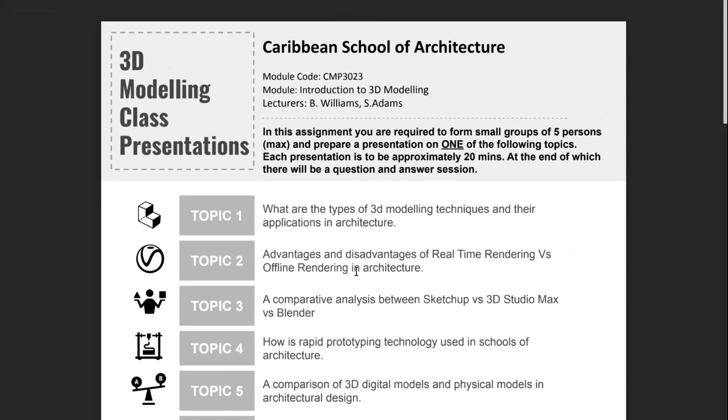Okay good. Now what we're going to do is we want to touch 2 topics today, and then in 2 weeks' time that would be the topic that presents. That's how we want to do it, so I don't throw you in the deep end. So I was hoping that persons from topic 1 and 2 would be here to benefit from the topic 1 and 2 discussion.

I'm looking back at my class list to see. No, I don't see anybody from... Oh, Janelle, you're from topic 1. Hi sir. All right, so you have 1 representative from topic 1. What about topic 2?

Let's take a quick look at that Miro board. Right, so topic 2 - Tara and Maken, not here as yet. Okay, so do we have the class rep in the class? Do we? Hi sir, I am a class rep.

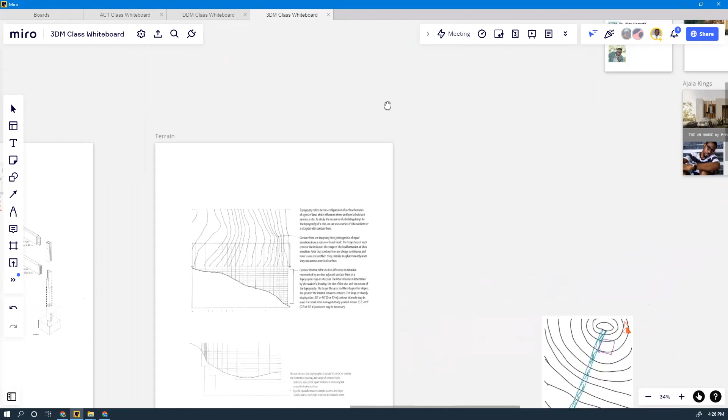Before I go into our discussion, we are currently also working on our major project. So persons should be submitting their terrain along with their CAD drawing, their design sketch, and their drawings. So the terrain was a part of last week's class activity.

So if I scroll to the class website, there we go. For those of you who submitted, you can check your grades. Is this linked up? Yes it is linked up. So this is where you can go to check your grades. There's a check grades button right here on the class website. When you go there, you can let me know if you don't see your percentage there for participating.

But remember how class participation works, we talked about this at the beginning of the class. We're going to have some activities that are randomly distributed throughout the course. You take part in these activities, it counts towards your participation grade. Participation is not just being present in Zoom - it's about proving that you had participated in particular activities throughout the module.

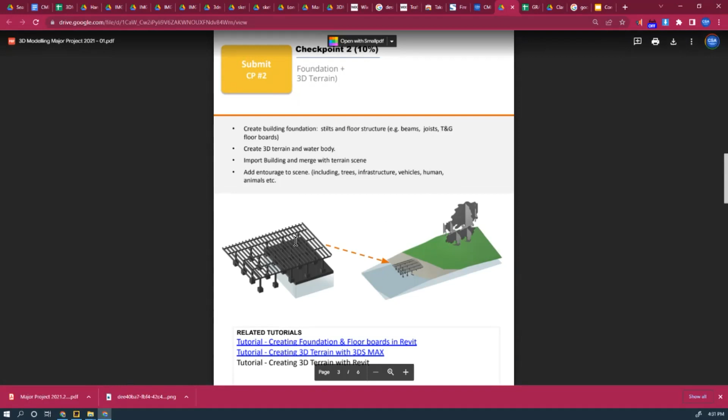Now the great thing about this is that on the handout—let's head back to the website here—if we look on the handout, there are some tutorials available. Now that we're moving into checkpoint 2, we want to have a quick discussion on the foundations. Checkpoint 2 requires that we do a foundation and a terrain drawing.

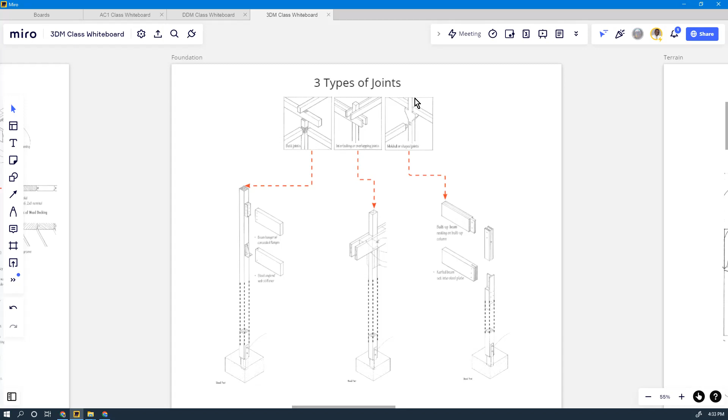Now if you look on the Miro board, there we go, you will see that I placed some nice reference material. Most of these are screen captures from Construction Illustrated, which most of you should know about. It's on the book list for recommended reading, and it's perhaps a book you've used during Design Studio, to remind you how different joints work, foundations, what certain details look like. Everybody familiar with this book, right? Yes, sir.

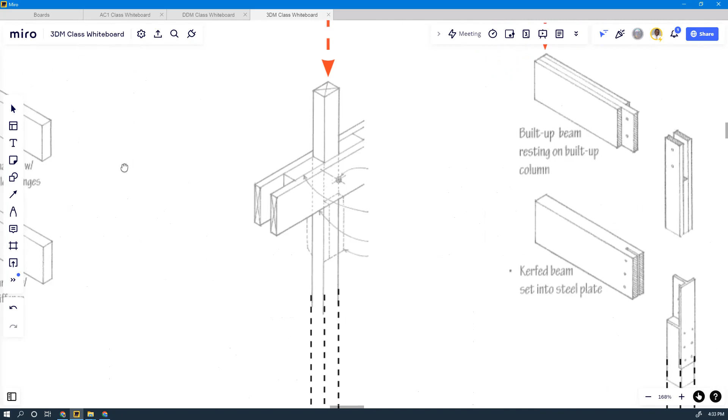I figure that yes is for everybody. So when you're putting the foundation together, I expect you to keep these approaches in mind. It is not necessary for you to draw or model nuts, bolts, and screws. But things like representing how they work—for example, in this case, we would perhaps need to model a section like this, and then another section that looks like this. We don't need to model the holes represented here, nor the angle plates. Those are not necessary to create. However, the model that is created must represent the logical way how these elements work.

Now what we're going to do is tackle this in Monday's class. So I'll do your practical class on Monday, and then we'll come again for another in-class activity. I want you guys to come with your Revit ready. We will also try to squeeze in some modeling in 3ds Max, but I figure most persons will be modeling in Revit. Every year there are persons who ask about terrain and organic objects, for a program that gives more freedom and flexibility.

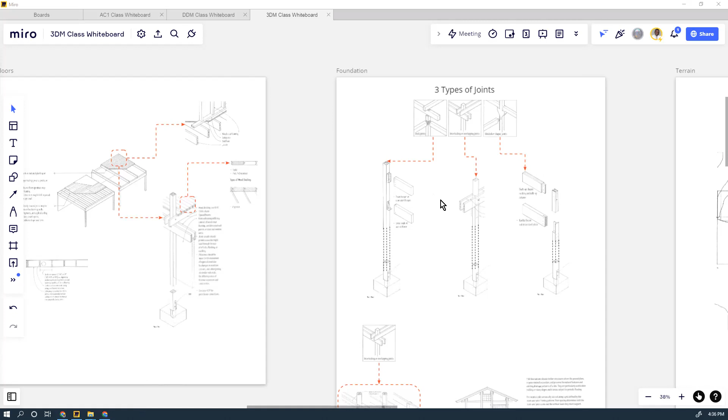I can't wait until which topic was it again? I believe it was topic 3. Topic 3 should educate us about the differences between some of these software. So I'm looking forward to it. Joel and Theodore, are you guys here? No, not yet. Okay, well anyway. Oh, it's because—okay, sorry, right. So I'm looking forward to your topic, for you to educate the class about some of this software.

So I'm giving you guys a heads up for that modeling session we'll do on Monday. Now you don't have to wait—the clock technically starts ticking from today in terms of checkpoint 2. Some of us already know how to use Revit and stuff like that. However, we will do an in-class activity to get everybody going. And if I look on the calendar here, we can see that one is due on the 24th.

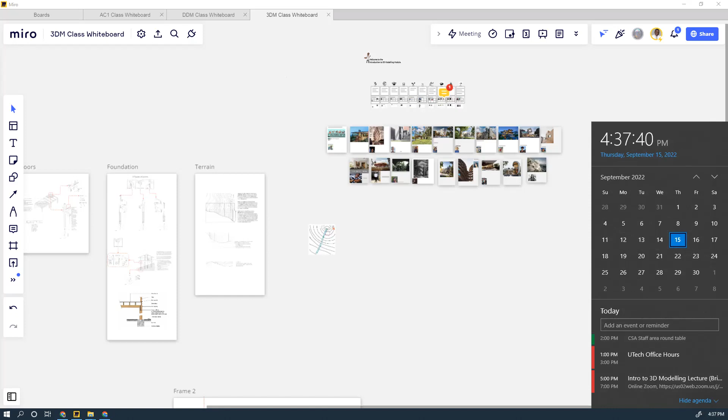Let's take a look here—on the 25th, right, which is the Sunday. Good, so for those of you who want to get a head start, that's fine. We'll do a little in-class activity on Monday. Now the good news is that the handout does have some tutorials, particularly this one about creating the foundation and floorboards. Oops, yes, those are ads.

These are tutorials that were created specifically for this module. I did create these tutorials as well, and I actually did it using the actual project. So this project was actually my project, which mimics the same project that you are doing here. It goes through how to create those floorboards. All right.

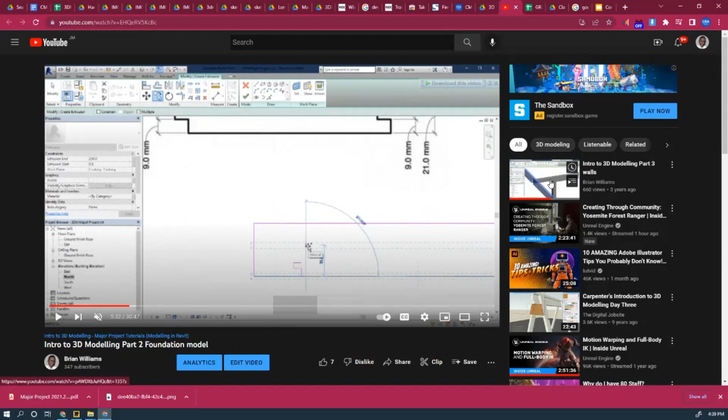All right, so what we're going to do on Monday in class is the terrain. There isn't a 3D creating tutorial made yet, so this will be our next in-class activity. Some of you who want to use 3ds Max to do your terrain can, because there are advantages. Some persons create their terrain in Revit and then take it into 3ds Max to make it nicer, so we'll look at how we can do that as well.

All right. Okay, let's open up.

Now, for those of you who want to get going on your model, you need to have your schematic drawings already completed, because it will help answer some of the questions you need to know to create your foundation. Remember, checkpoint 2 requires only the building foundation and floor structure, meaning the beams, the joists, and the tongue and groove floorboards. You don't need to start creating the walls yet. Here's a quick example of what it should look like. That's straightforward, so these are the two things required.

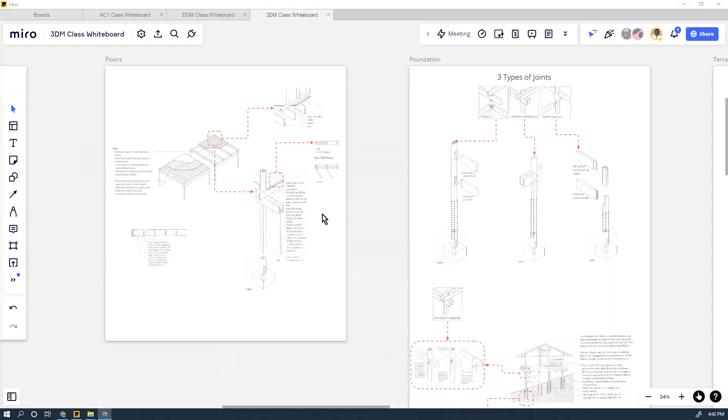It's only fair because the persons who did select groups did not know what the topics were. All they got was a little hint at the top, and they had to choose the topic. So technically they didn't know either, but some people kind of figured it out. I think it was Tara or Janelle that figured out that this is a V-Ray icon, so it had something to do with rendering, and then the topic was revealed. That's the kind of activity we did.

All right, so give me the names of the persons who are not in groups. Anybody here who is not in a group? Can you raise your hands? Oh, nobody? Oh, one person? Okay, cool, just one person? Or Kiana?

There are 3 persons in the chat. Oh okay, yes, let's put it in the chat. That makes it easy. All right, come on.

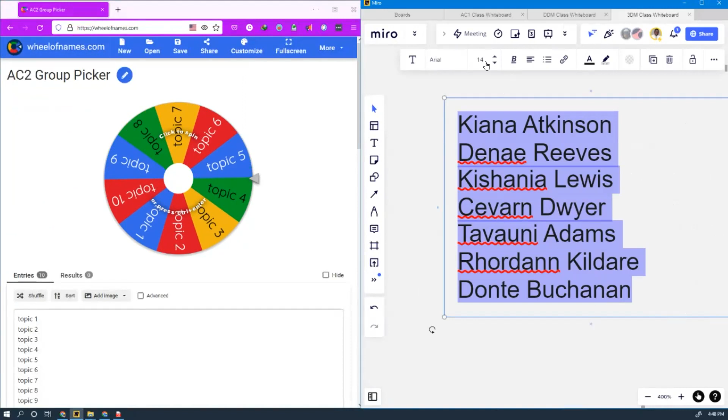So the first person on this list, let's go here, all right, let's do this quickly. So Atkinson, and you are in group 10. All is fair, Atkinson, right? Do you know what group 10 is? No sir, but I'll check it out. Thank you. All right, just take a quick look on the Miro board and you will see it.

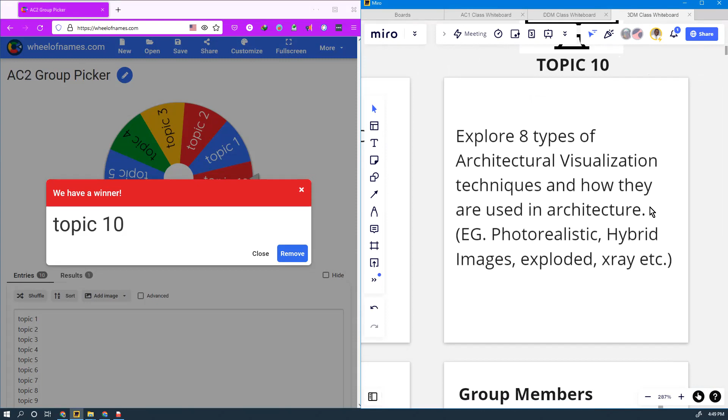Okay, Atkinson, so group 10 is to explore 8 types of architectural visualization techniques and how they're used in architecture - for example, photorealistic hybrid images and stuff like that. We're gonna talk about this one day in the week, so stay tuned. You never know when it will be your group's discussion, and it will definitely help you in your presentation. So I'm gonna put your name here, and then you will just drop your photo in that box for group 10.

Next on the list - I'm gonna remove group 10 because I don't want multiple people ending up in one group, so group 10 is out. Not to worry, we have 6 people remaining.

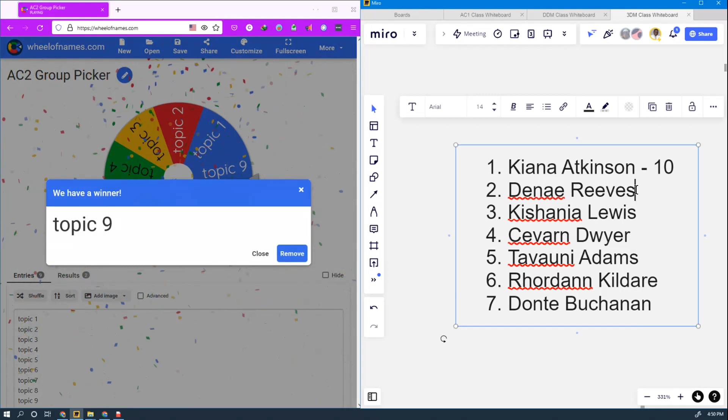All right, Reeves. And Reeves goes in group 9. Wow, it almost seems like it was planned, but you know it's not because I'm not the one controlling the wheel, right? So Reeves, you are in group 9. Reeves, you here? Yes, sir. All right, so you will be looking to discuss the use of 3D modeling in fractal architecture.

Do you know what fractal architecture is? No, sir, but I'll figure it out. All right, cool, that's what we want to hear. I'm eager to learn that as well.

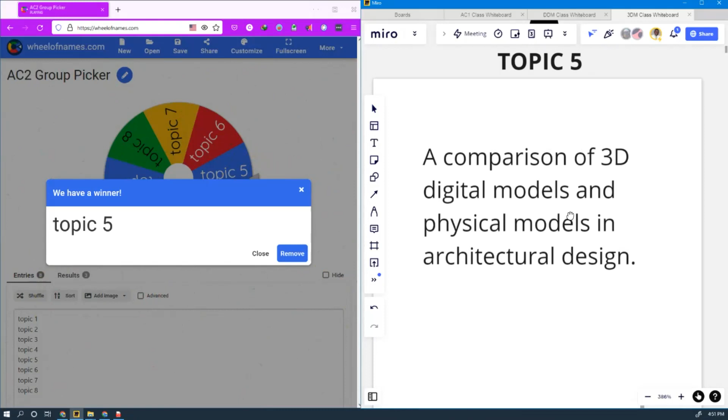Next on the list we have Lewis. I wonder if Lewis is going to get topic 8 - then I would know that this system is rigged, but I hope it's not. So it looks like topic 5. All right, Lewis, you here? Yes, sir. Right, a comparison of 3D digital models and physical models in architectural design, right?

Do you love to make physical models? No, no, sir. Well, you'll be looking at and comparing physical versus digital models, so you can voice your opinions and concerns in your presentation, right? I'm sure the lecturers want to see you make physical models, so that will be an interesting conversation.

All right, next on the list we have Cevarn. All right, here we go. Tavauni, sir? Say again? Tavauni. Oh no, sorry, I meant Dwyer.

That is who is next on the list, so Dwyer would go in group number 4. Dwyer, are you here? Yes, no, maybe so. Yes, sir. All right, Dwyer, right, so you're in group number 4. So in your group,

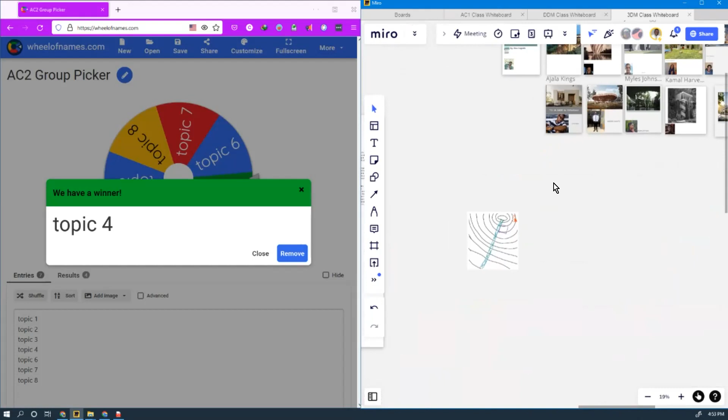Yes, sir, that's good. All right, I hear you bursting with enthusiasm. All right, Adams, here we go again. Let's see, I think Adams is going to get topic 3. All right, Adams, and your topic is a comparative analysis between SketchUp, 3D Studio Max, and Blender.

What do you think of that? Go again, sir, I didn't hear that. Your topic 3, a comparative analysis between SketchUp, 3D Studio Max, and Blender. All right, can you use any other programs on that list? Like SketchUp. I think SketchUp. All right, good.

Excuse me, sir, if he's inclined, could we switch? So you want... when do I get... arrange a trade? If he's okay with it. All right.

Adams, do you want to trade groups with - hold on, who just said that? So it's Donte, I haven't been given one yet. Oh, but you can't trade and you don't know how much you have. That wouldn't be wise.

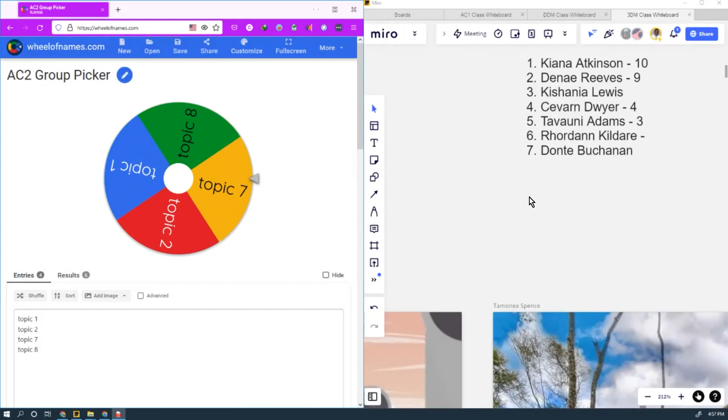All right, and Donte, the person who wants to trade, let's see what you will be trading. If Dwyer agrees, it looks like you'll be trading topic 7, which is: what are the differences between presentation drawings, design drawings, and construction drawings?

Dwyer, do you want to trade with him? Speak now, quickly. I said not Dwyer, it's Adams. Oh, it's Adams, oh sorry, it's Adams. Adams had topic 3. Adams, do you want to trade? Talk quickly.

Not really, sir, but... you can just add him to the group, sir. It's fine, it can stay as is now, because this topic is okay as well. Oh, so now you change your mind.

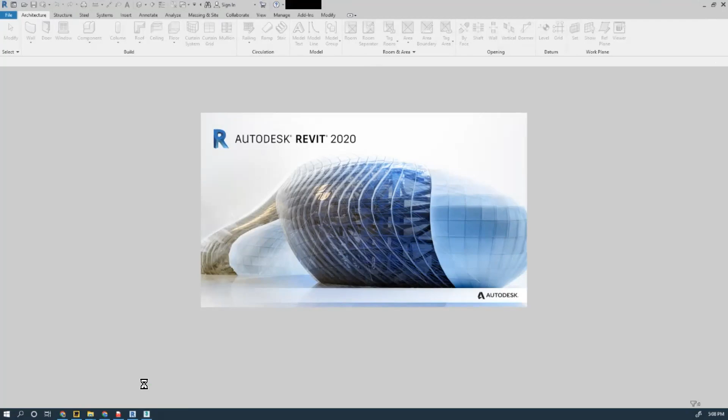So for example, like this program, this is 3ds Max, and just give it a while to settle in. There we go. And the way in which you draw a shape, if I needed to draw a wall, well, this is a wall, and the technique that I'm using is using parameters, because I can change the width of the wall and the height of the wall and that kind of stuff.

Well, I'm actually modifying a box. So this is actually a box, and I'm making the box look like a wall. But then there are other ways that you can do it. So for example, I could use a rectangle, and then I could extrude. Now this is not a tutorial on using 3ds Max, but these two objects look the same.

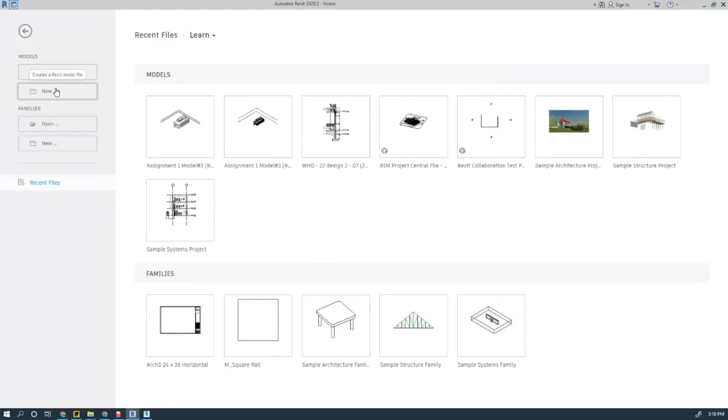These two objects look the same, but two different techniques were used to create them. If I was in Revit, for example, and I open a new drawing here, then the technique in which Revit creates a wall is different than the technique that I use in Max. But in Max, I could use two different techniques.

One of them could be taking a box and squashing it into a wall, and the other one is that I drew a shape and extruded it. Yet still, in a program like Revit, there is a tool called Wall that I can use, and I can draw a wall, and that's what that wall looks like in 3D. So this is the same wall, but I'm using different techniques.

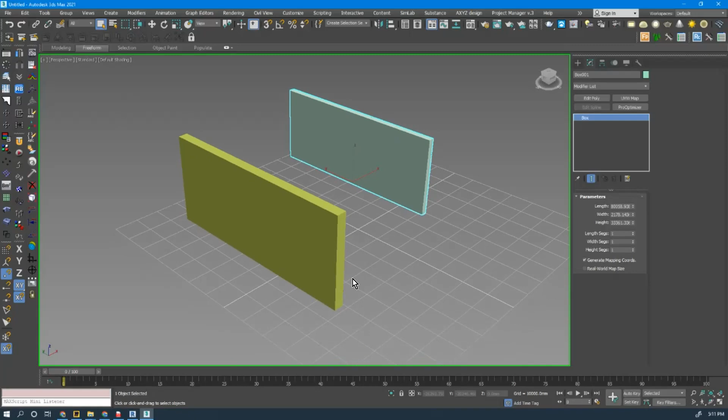Now, the technique that I use in Revit, which is a wall tool, doesn't exist in Max. But then the technique that I use, which is extrude, that technique also exists in Revit. So what am I getting at? Different programs allow you to use different techniques to create different objects.

I'm going to open one of these here. I'm going to show you this cool model that I did some years ago using a modeling technique. I don't know if it will open because it's kind of old, but we shall see.

All right, so in the meantime, let's head back to the Miro board. So the types of modeling techniques, that is what Tara and Janelle, you're going to be looking into. What type of techniques exist out there?

The fact that I went into a program and created an extrusion, that is a technique actually. I'm not going to tell you what it's called because you guys need to figure that out, right? Okay, so

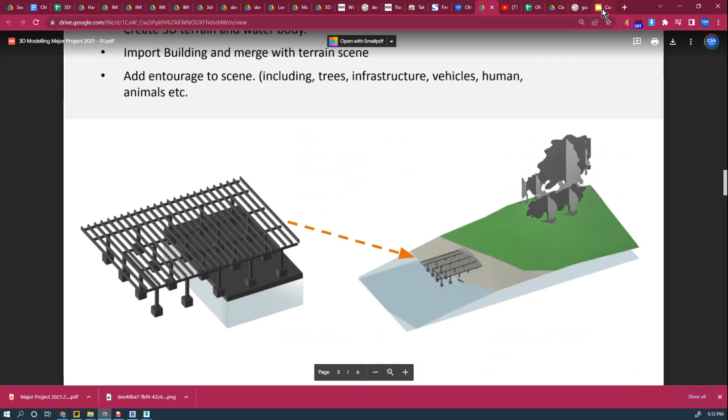let's just maximize this. Now, one thing that you have to be aware of, by the way, Tara and Janelle, you guys taking notes, right? Because this is your topic. Are you there? Yes. All right, good. Then the other members of the class, you guys need to be noticing as well, because they're going to ask you questions.

So this is just to be aware, and this is just some tips I'm giving you for your presentation. And I have tips for everybody, so don't worry, I'm not just going to do this for one topic. Beware, there are different types of modeling. I mean, literally, I know that we like to just type a word into Google and just grab the first thing that it says. But if modeling, there are different types of modeling.

There's fashion modeling, there's data modeling, there's 3D modeling. There's probably other modeling that I don't know about. So when you're digging into information, you're going to want to make sure that the conversation is talking about 3D modeling, and not another type of modeling.

So you could argue that there are as many modeling techniques as there are modeling tools. And this is perhaps one of the things that you will find. You're not going to say, oh, there exists 4 techniques, and everybody who does 3D modeling, they do one of these 4 techniques. That's not how it works.

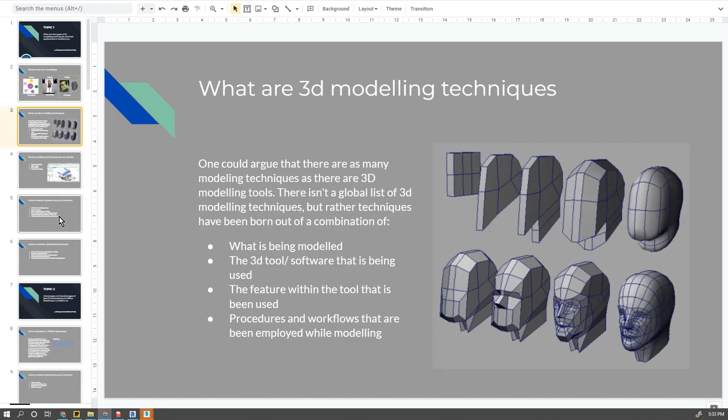All right, there's another topic, I'll give you a hint. In the last group, the last thing that we discussed was modeling techniques offered by software of your choice. So, hint, what other topic do you think you should look into?

Sorry sir, I had to step away for a second, could you repeat the question? I was asking what other topic. So, in the interest of time, what about the software, right? What software supports offline rendering and what supports real time? That's definitely something that I think you guys should look into.

If you think about it, when you guys are doing your design studio, you need to show rendered images. So what kind of rendering are you using? What kind of rendering does the architecture student use? Do students prefer more offline or online? You should probably look into that, like the critical uses of them, because at the end of the day they need to achieve a particular purpose.

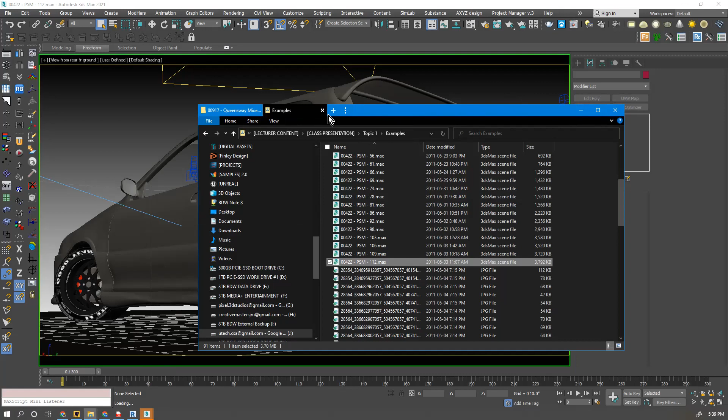that was created using a type of modeling. I'm not going to give it away because Tara is supposed to tell me the different types of modeling, right? I'm not supposed to tell. Why isn't this clicking? Okay. Oh Lord. Okay, for some reason you don't want to. No, brother. Think it might be frozen there. Okay, let's open another window.

All right, here we go. Oh boy. I'm gonna have to find back that folder. There we go. And oops, we then gone into the wrong course. There we go. That's where we're supposed to be.

Share content. All right. Sorry, the folder just kind of froze a while ago for some reason, and I had to find my way back to that folder. Right, we're back. Okay, so this was a 3D model that was created of a vehicle.

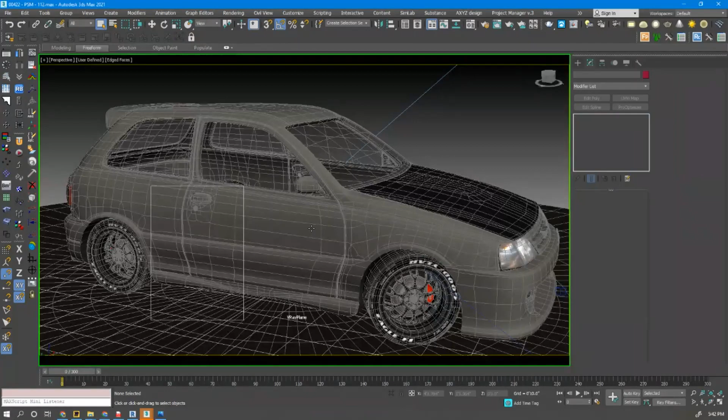So, there we go. Good to know it's still open, right? So this is the actual 3D model of the vehicle. You can see those are the polygons that were used to create it. And a particular modeling technique was used to create this model. And I'm going to be looking forward to topic one to tell me what type of modeling technique, right? And speaking of rendering now, it was an offline method that was used to render this project.

I seem to have... I don't see the rendered images in this folder. I have them somewhere else. Let's see. Okay, all right, here they are. So I think they are here. Right, it was a long time ago, so I don't have all of the images, but I do have some of it.

So that was fun, and I usually show this project in 3D modeling class. Not that you guys are creating vehicles, but you are using 3D modeling techniques to create things in 3D. All right, so that kind of ends our presentation discussion. I hope you guys took notes.

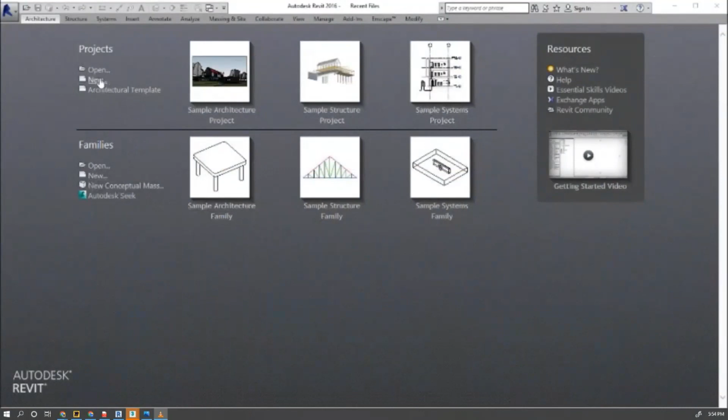Finally. Okay guys, you guys are seeing this video, right? Okay, so the first thing we're going to do is open a new project. We're going to choose the architectural template. All right, and when that comes up, now what we have here is we're going to start off with building our foundations.

Now this is done using Revit, because we should be using Revit to do this project. Usually at the end of every checkpoint, the Revit file is also collected. So we're going to be using Revit to do this aspect here. You'll notice that all the levels, some default levels, sites, and elevations have already been created. These pointers that you see in here are actually for the elevation markers.

So the very first thing we're going to do is set up our levels according to how the design of your island getaway is laid out, right? So we're going to take an elevation view, and you'll notice that Revit gives us 2 levels by default. And right now we're using the metric.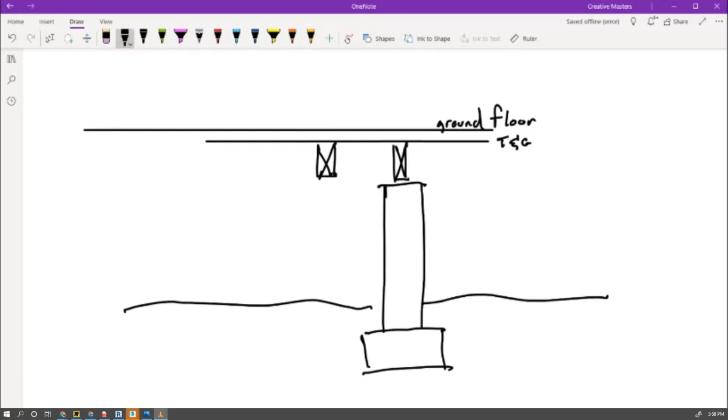And if we look at the basic layout, you may have some floor joists below that, and you may also have some sort of footing, and that would need to sit on a foundation pad. Then the earth would be around there, and depending on the nature of the foundation, it may be a pile foundation, so you may need to show your piles going down below the ground.

In any case, what we are looking at here are a few levels, so let's highlight that. So we have the base of our footing, and that's there - that's the base of our footing. Then we have the top of our footing. We also have the top of the foundation pile. Then we also have our ground level, so let's extend those out. Then we also have the top of our floor joists, and then we have our finished floor level.

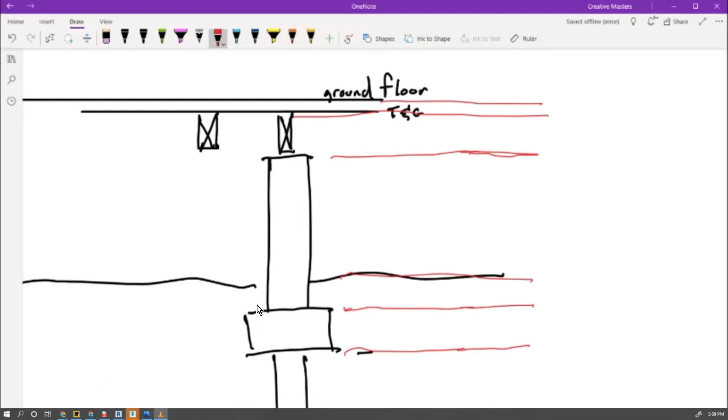Now everyone's design might vary slightly, but all of these need to be levels that are identified within our drawing. Alright, so does everybody understand how levels work in Revit? We would have been introduced to Revit last year - do you remember? Have you ever forgotten?

Right, yeah. So the very first thing you want to be doing when you're starting your checkpoint 2 project is you want to be setting up your levels first. Now you see how I have this sketch here? Everyone should have a schematic drawing, and from that schematic drawing you can get an idea of where these levels are. Everybody's foundation might be different, but at minimum you want to have all of these levels mapped out, because it would just make modeling way easier. Sorry, not layers, but levels.

So if we go back to Revit now, we notice that we have 2 levels. So we're going to delete one of the levels because it's going to be a single floor building, and we're going to call this our ground.

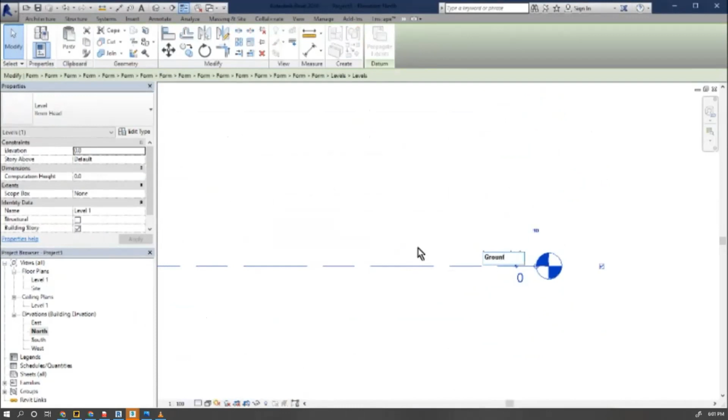Finish floor. Yes, we want to rename the other levels. What we want to do is to have our other levels as what we call empty levels, right? So those levels are just going to be used for referencing, and you won't necessarily see them come on the list of levels that you see in here on your left.

So to get empty levels, all we need to do is just copy this level. So we're going to copy this level down, and we're going to go down about the thickness of our tongue and groove board, which is going to be about 50 millimeters.

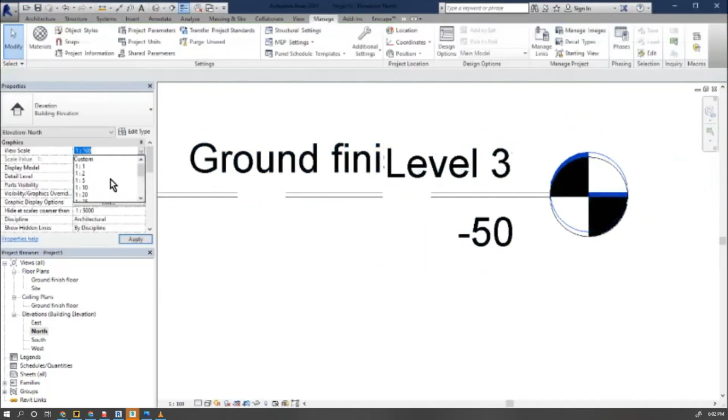Then what we want to do is to change the scale of our drawing. We're going to make that a little smaller just so we can see these levels here. And these empty levels, what I want us to do is unlock them and have them be shorter than our main level. So we're going to call this level here, according to our sketch, the top of the floor joist, right?

So this top of floor joist, and we could even choose a smaller scale so that can be smaller just for our purposes. So top of floor joist, then we're going to go down another level again, and this will be top.

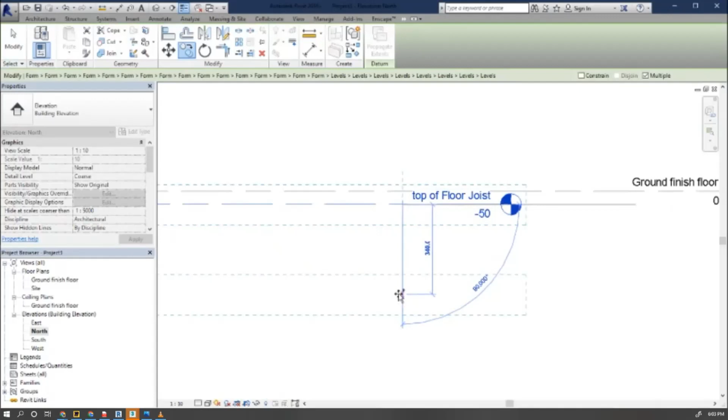We're going to copy that first, and this will be top of footing. The distance here would be the height of the floor joist, if you can see here. So this will be top of footing.

So we're going to click on that, and we're going to put a dimension line. We're going to choose dimension there and drop a dimension here, and I'm going to assume the height of this is going to be about 200 millimeters.

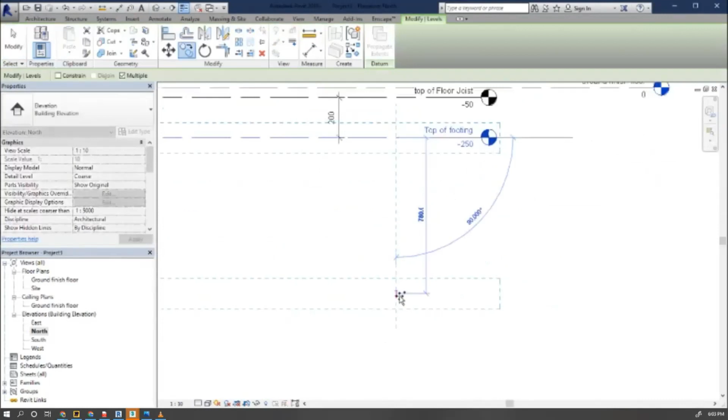There we go. Then we're going to now have the bottom of footing, we could call it that way. So we're going to call it bottom of footing, right? And what I'm doing, I'm just copying these, using CO, and then we're going to call this base of foundation pad.

And this distance might vary depending on the height of your project. So I'm good with imperial, so I'm going to click on this and make this about maybe 4 feet. I can write 4 feet, and it will actually change it to millimeters for me, so it's about 1200 millimeters.

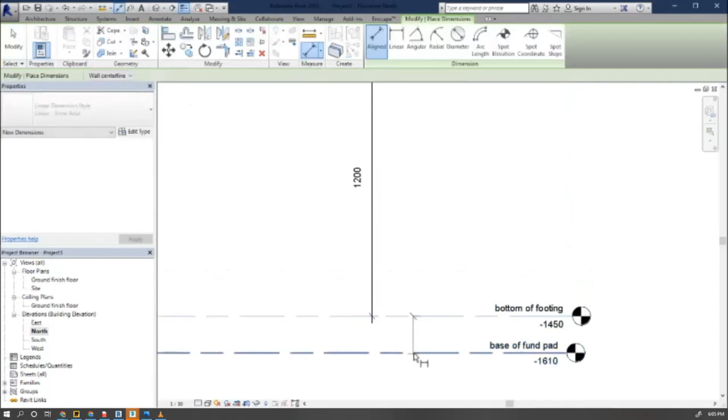So pretty much we've set out most of our levels. Let's make sure that these are aligned. This should be the only one that's out. Then on the top of our finished floor...

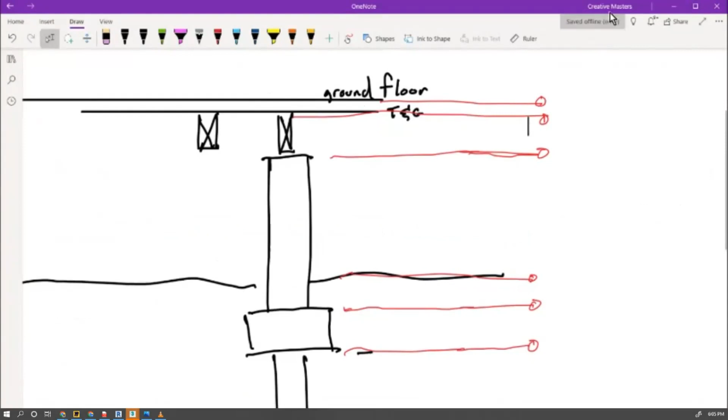At this point what we're going to do is use our reference image, and if we look here, we see where we have our reference image. So far we've drawn the footing, and we've put in most of these levels to match what we have here. So we have up to that point, that is the top of the footing, and we actually have a member that's right here.

So that's that member that we're seeing there. That's actually before we get to our level with our rafters, right? So we're using this as a reference to create our foundation. So we are going to ensure that we have, this one is called a bearer in this particular drawing.

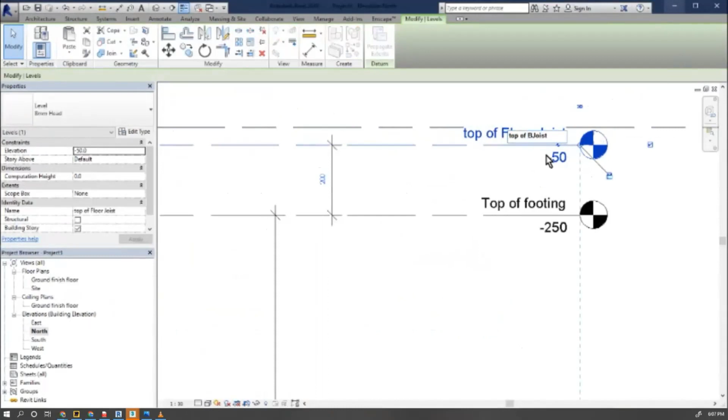So after we have the foundation, we're going to have the bearer, and then we have the joist. So we're actually going to edit this one, and we're going to call this top of bearer joist, which in this case wouldn't be 200, this would be about 100.

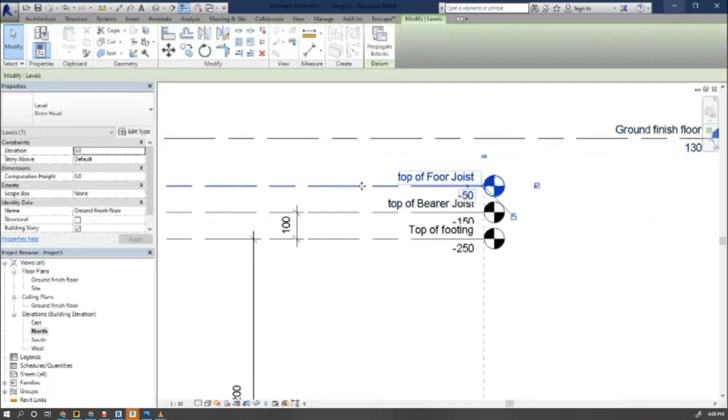And then on top of that now, we would have our floor joist, top of floor joist. And on top of that, we would have our finish, our ground finish floor. So the top of the floor joist here...

is going to be 200. So we're going to click on that. And then the top of the finished floor, well, that will be about 50 as we had before. So we click on the top one. Now we're going to make that 50.

So if we look back at our reference, we have space for the bearer joist, and then we also have the floor joist there.

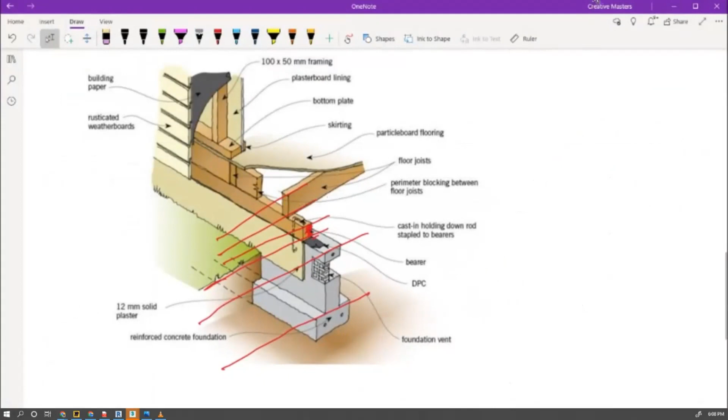All right, so now what we need to do is start modeling our footing. The designs may vary, but we're going to use a default footing. Now I'm going to switch to our ground finish floor level. Notice that you're not seeing the other levels here because those are empty levels used only for referencing.

So the first thing we're going to do is put an outline for the base of our building, using some reference lines for that. We're going to use reference planes as a guide to know where our building footprint will be. We're going to choose reference plane, and draw out my building like that, and edit it.

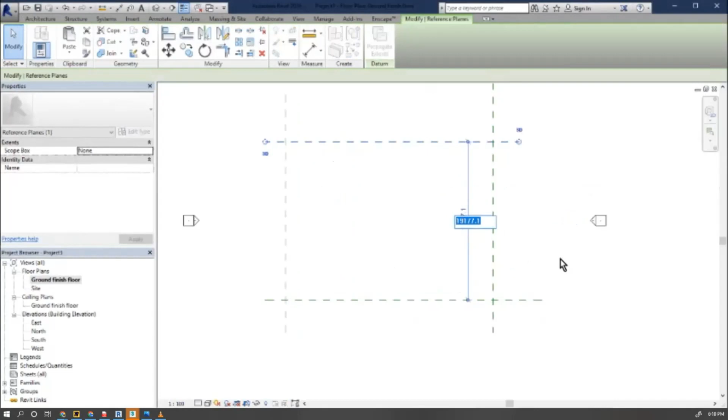I believe we are using 6 meters, that is my footprint. Yours may vary slightly, so we're going to put this at 6,000. Between here and here is going to be 6,000, and that's about it. This is pretty much the size of our building, and we know we're going to have our footing inside this area.

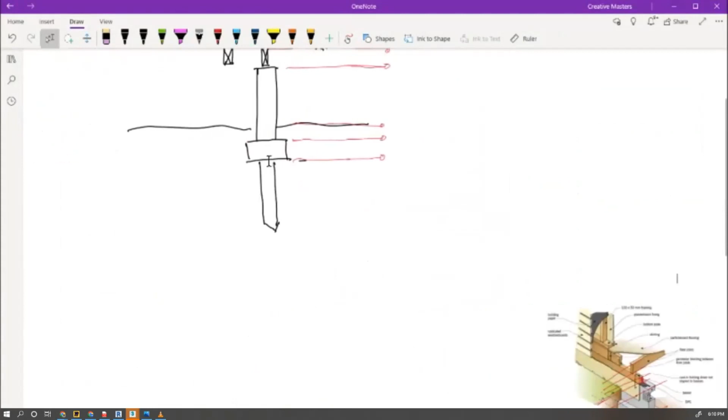The first thing we want to do is draw one of our foundation footings. We're going to use this as our guide, and we can also use our sketch as well. I'm actually using OneNote here with my tablet so I can sketch this out. You guys should have a sketch that you're using as your guide, and we're going to now model this foundation footing.

Let's assume that the foundation footing is in this area. Just to map out our game plan, we are going to be drawing our footings like that, and like that, and like that, and like that. Essentially that bearer that we saw earlier would be running across these areas like that.

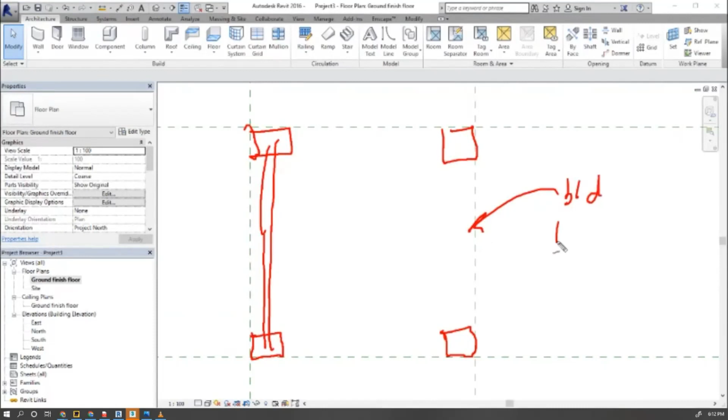As a matter of fact, if this is our building footprint, then we would actually want to move our foundation footing over a little bit. Our footing would actually want to be about that, so that the center of our footing is there and the bearer member would run along like that, so that it is on our footprint. So that's just a quick overview of what we are aiming to do.

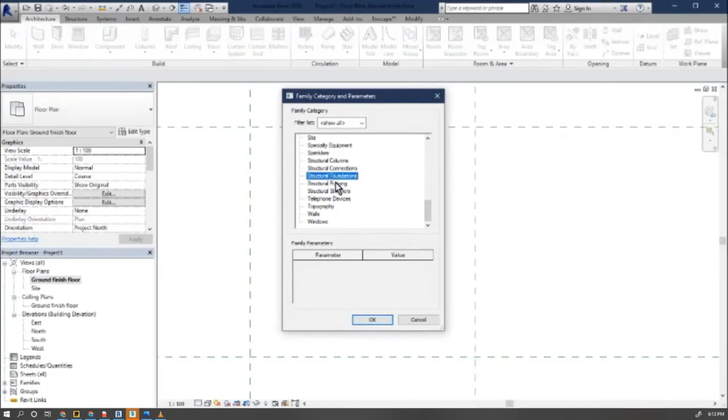We're going to draw the footing as a model in place. We're going to go over to component, go to model in place, and we're going to be doing the foundation footing as well. You actually have structural foundations there, so we're going to choose OK. I'm going to call this footing.

The type of modeling we'll be doing will be using the extrusion. We're going to assume that the footing will be about 450 millimeters wide. We're going to use our reference plane to guide where that footing will go. Generally our footing wants to be about 150 from this line.

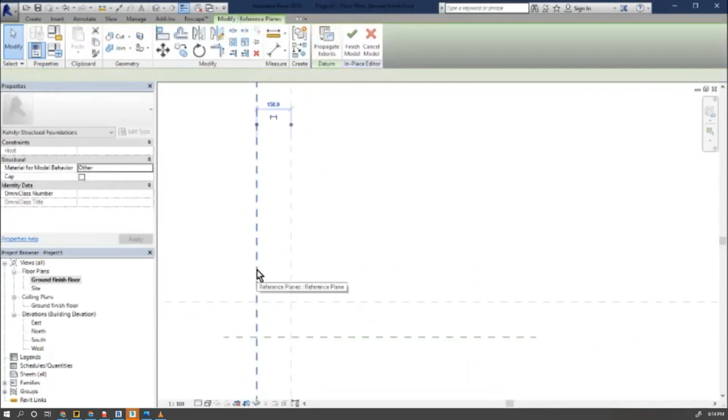We're going to draw, we're going to create, and go back to reference plane. We're going to draw another one here, making that about 150. And we know this needs to be about 450 offset, so we'll click that and copy, making that 450. We're going to do the same here, copy, and make this 450.

From that, we know that the top of our footing, if we go here, that's what we're going to be looking at. We're going to be copying this up about 150, and copying this over 150.

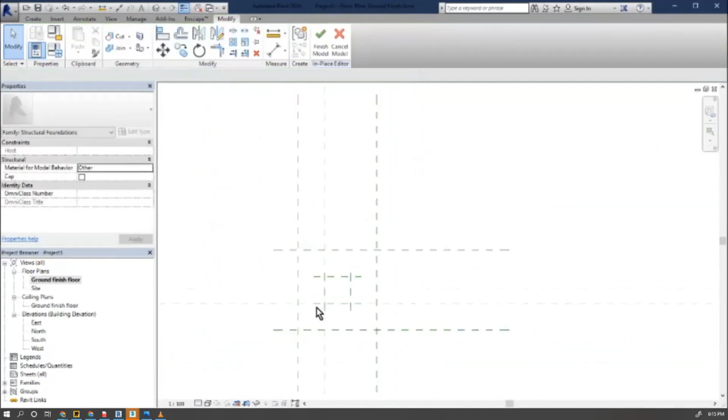Sorry, we're going to use reference plane, not reference line. We're copying that over 150. All right, so this is the center of our footing. Of course, nothing is in 3D yet, these are just simple guidelines that we're going to use.

To actually start modeling, we're going to go to create, and use the extrusion command. This is going to carry us into sketch mode, so we're going to draw the base of that extrusion using the rectangle tool, and we are going to be drawing on a particular level. This part is important, remember we created those levels, so we're going to set our levels before we start modeling.

Click that and go to set levels, and we want to actually be drawing this on the bottom of foundation pad, because this is the bottom of the foundation pad. So we choose OK, and then we're going to be drawing this like that. That's great. Now what we can actually do is look at this in 3D, so we can go to our 3D view. And that's it there, and we want to choose OK.

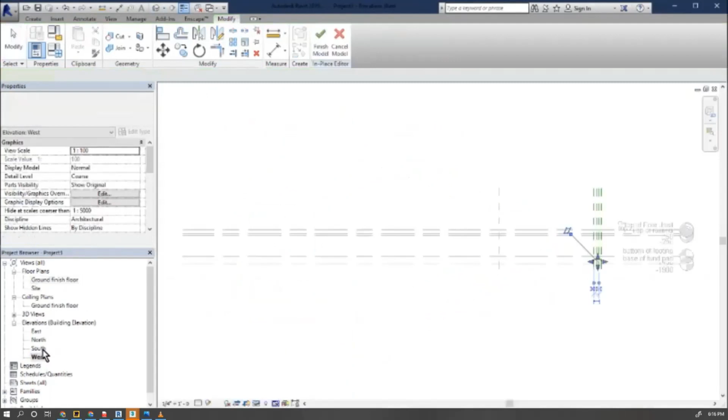And that's our extrusion. So if we look back in that view we had, I think we had the east view, north view, right? So we can see where we have the base of the foundation pad and the bottom of footing. So this is this high, like that. This was the purpose of us setting up the levels, right? So if we go back to 3D, that is our foundation footing.

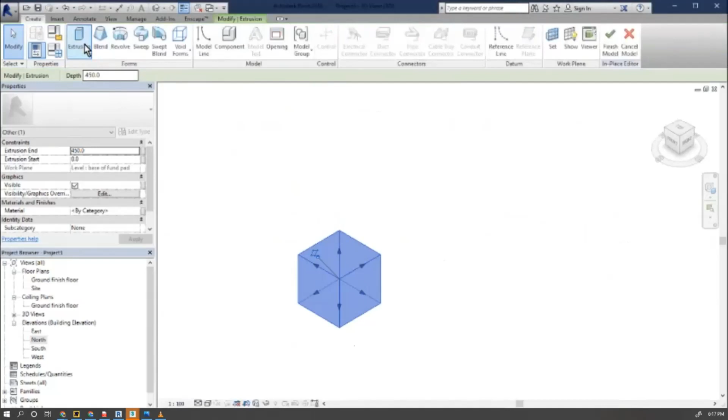So next we are going to create another extrusion now, which is going to be on top of this. To do that, we're going to go back to our plan view. So we created this already. We are going to go to create, and create another extrusion, and we're going to set that now.

So that level needs to be at the bottom of footing. And we're going to use the rectangle tool and draw that like that. And to set the height, we can go to our, choose OK, and then go to our 3D view. That's here, and that's our pad, that's our footing.

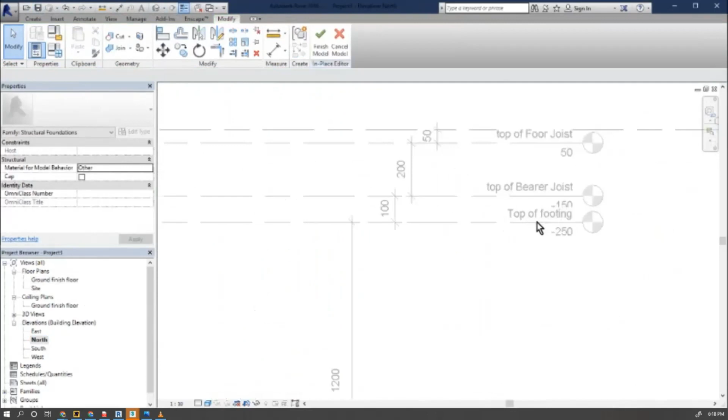So we can go to our north view here, and we can make that height. So far we're okay. Let's change this to shaded view. We have the footing, and we have this up to the top of footing. Now for that bearer joist which runs on top of this.

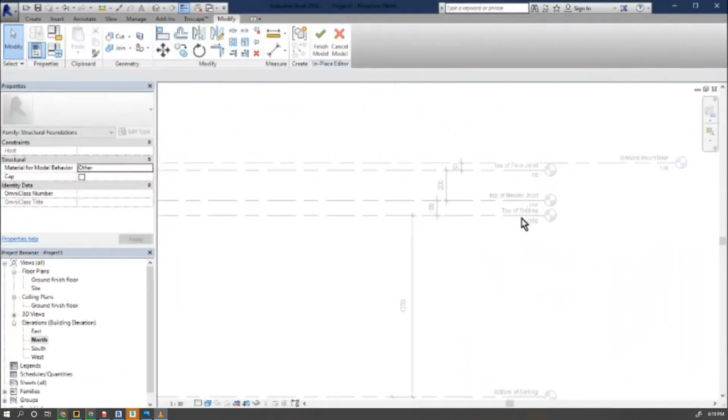So remember that we're using our guide, which is here, and we're going to be using this bearer joist here. So we're going to assume that this bearer joist is probably 100 by 100 millimeters, and that's going to sit within this here, because this level here is our bearer joist level, top of bearer joist. Now we don't want that to become a part of the footing model, so we're going to choose OK.

And now if you click this, you notice that this is one model by itself.

I'm not sure where I'm getting the feedback. Probably has something to do with the feedback from the laptop that I used to record it, so try and ignore.

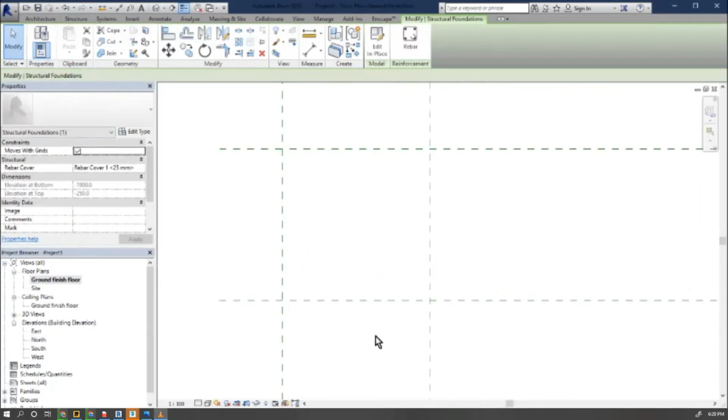So if we look in our 3D view, you actually see the model there, and if you click on it, it will tell you that it is a structural foundation that we have created, which is great. So let's go back to our ground floor, and notice that we're not seeing it here, and that's because it's actually below our ground plane, right?

And to adjust that, we are going to go over to our view range, and our view range is simply telling us that we need to be able to see our view depth. We need to be able to see about, to find what this figure is, we could use a north view. If this is our ground floor, we need to be able to see all the way down to this level.

So if we use a dimension line, we need to see at least 2,000 millimeters below the ground level. So let's go back to our ground floor, and let's go to view range, and we need to see 2,000 millimeters as our view depth. And we also need the bottom of our view to be 2,000 millimeters, which is really negative 2,000. So this doesn't have to be 2,000. There we go. So now notice that you see the footing, because you're now able to see 2,000 millimeters below our ground plane, right?

Okay, so now what we're going to do is we're going to put in that member that runs around the edge, which is our bearer. And before we do that, what we want to do is copy this footing.

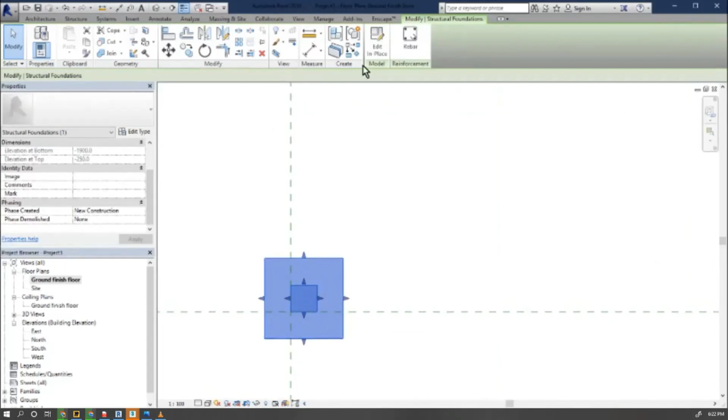Now we're not just going to copy it, we are going to actually make this member into a group by clicking the group icon here, and we're going to call this footing group. And the reason we're making it a group, I'll show you in a sec, so we're going to copy it. I use the shortcut CO, so I'm going to copy it from here and put it over here.

And then we're going to select both of these. We're going to copy these from here, place that over here.

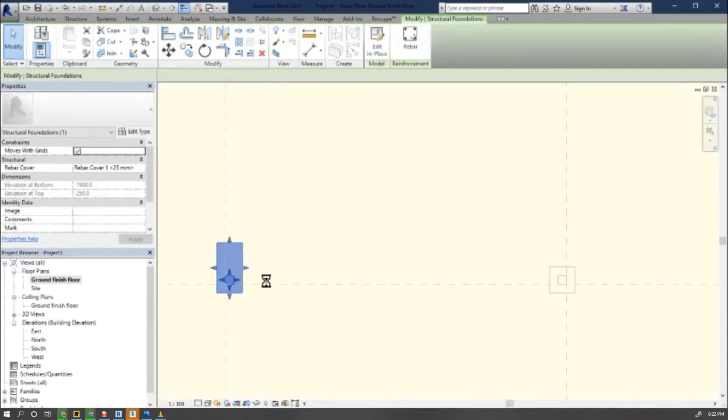Now, the fact that we made it a group means that if we needed, for any reason, to edit this group, we can double click this and change that. And what happens if we change it, this for example, then notice they will all change, right? Which is great. So we're going to undo that because we don't actually want to change it. There we go. All right.

So now we need to run that member along the edges here. So we're going to go to our component and model in place again. But this time it's asking us to save, so it's a good idea to hit save now.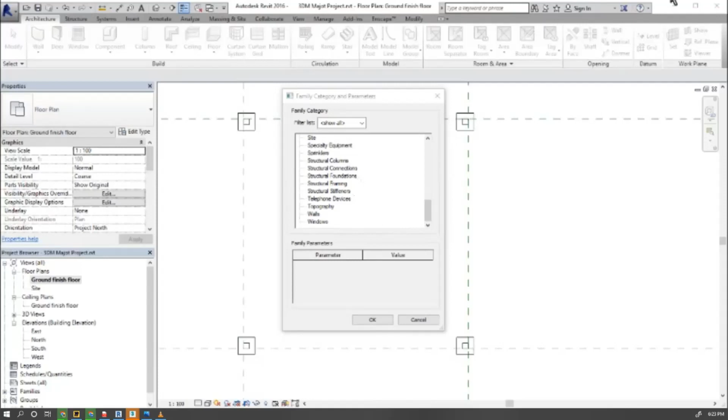So now that we've saved this member, we are going to make it a type of structural framing. We'll choose OK, and call this bearer member. This member is going to be 100 by 100, and we're going to let it run on the outer section of the foundation.

To do that, we are going to make it an extrusion, with one member starting from here, up and over by 100, and down again. Of course, you could also use the rectangle sketch to do that.

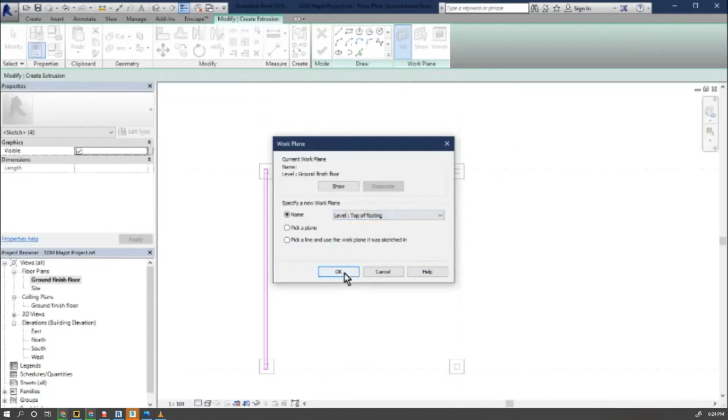We actually need to place this on a level, so we need to select that and set the work plane, and this level needs to be the top of footing, right here. We'll choose OK, and look at that in 3D and see it's at the top of the footing, and choose yes for that.

So we have that member going across, which is great. Now we need to have this member going across the other areas. So we're going to copy this using our 3D view over to here, and copy it one more time, using our rotate.

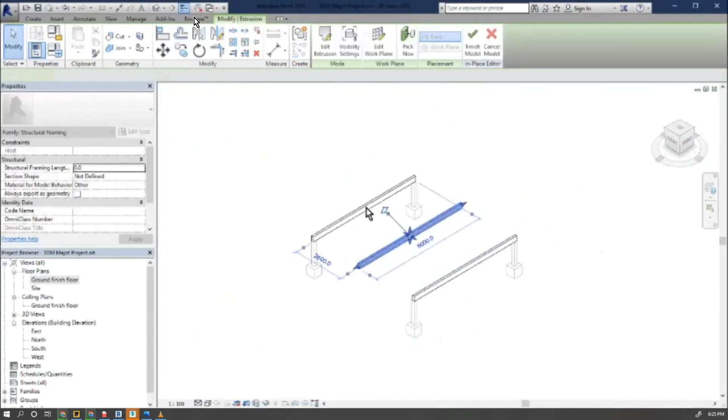I'm going to rotate that 90 degrees, and move this with shortcut MV. We're going to move this all the way to here, land that there, and then adjust this to line up, and copy this.

Let's use a top view for this. We're going to move it there and paste it there. So we have now drawn that member there, and we're going to choose finish, and there is that member there.

Next, we could turn on our shaded view, and put shadows there so we can see what that looks like. Okay, so that's what it looks like.

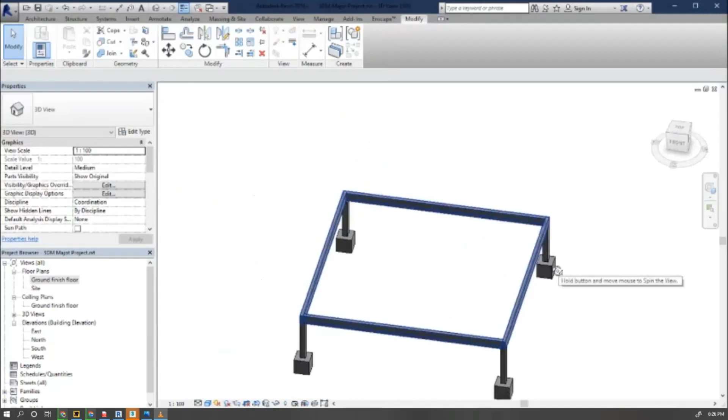Then next, we are now going to put our floor joists going across in a selected direction. So we're going to do the same thing again: go to our ground floor, go to architecture, and go to model in place. We could also use this model as a structural framing, since it is a type of structural framing. I'm going to call these floor joists.

Now we're going to create one joist first, using the extrude command, and our joist is going to measure these here, so we want to make it 50 by 200.

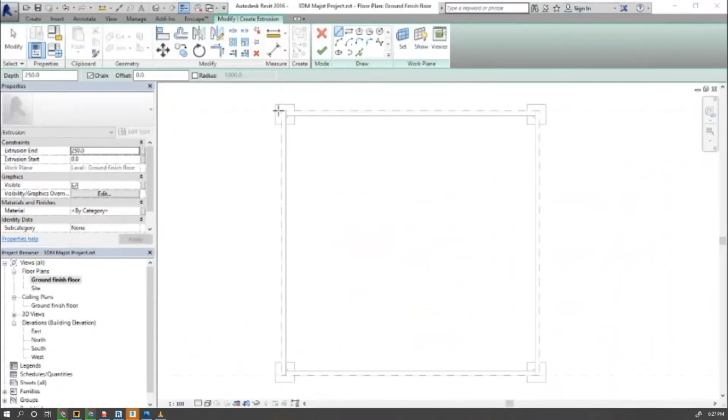So let's draw the first joist at the end. We're going to allow that joist to land right here, so we're going to use this tool this time, and use here. We're going to go across by 50, come down like that, and go across and go back up.

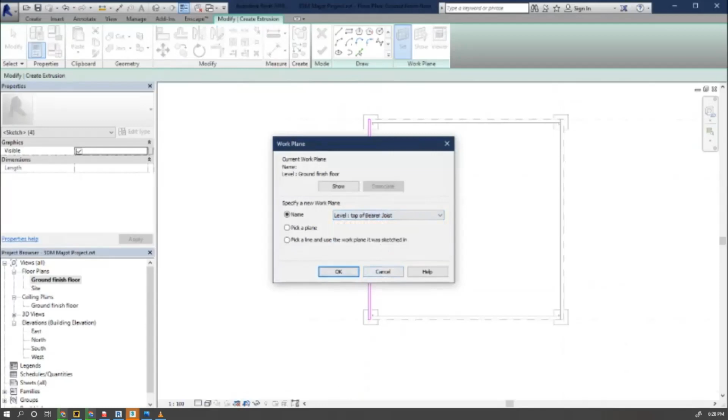And of course for this level, we're going to select this joist and set this level to top of bearer joist, right? Remember, that is the top of the bearer joist, that's why we choose that level. We'll choose OK, and look at that in 3D, and see where that's now going to be on top here.

Oh, actually our bearer joist is too tall, so we need to fix that. Let's choose OK, and go back, choose OK again, and go back into our bearer joist here.

We're going to double click that to go into it, and edit these. We're going to select all of them holding Control, and set the extrusion end to, I believe it was 100, right? So it's 100 by 100, apply, there we go.

There we go. So if we look on our north view, we are going in alignment with everything. So top of bearer joist is at the top, and we need to of course make our joist here, which it says top of joist.

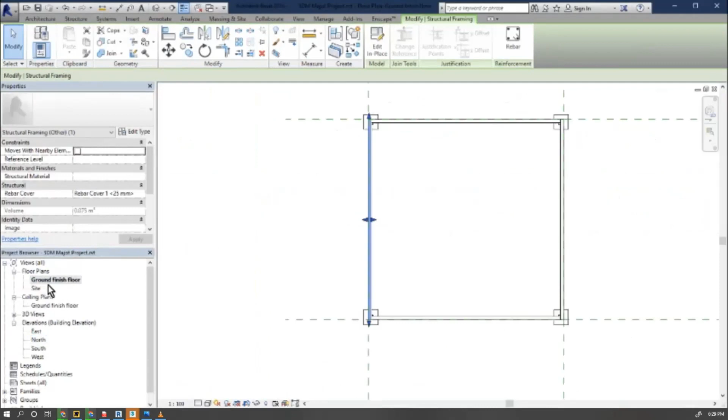So we are going to go into our 3D view, select that, and make this member here, edit it by double clicking, and we are going to make this 200.

Alright, now we are going to create an array so that we can have members going all the way across like that. So we're going to use the array tool, and the way this works is really simple. You click the array tool here, you choose a point that you want to use as your starting or reference point. So let me choose here.

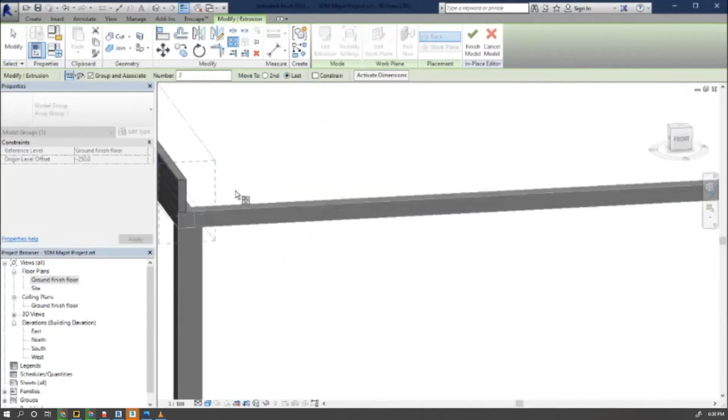Before I choose that, I want to select the last member. So I'm going to choose the first member, which is this, and the last member, which is that, and then I will choose how many divisions I want. To do that, I'm going to choose this point here, and then choose that point here.

Let's try 15 members and see what that looks like. So I can put 15 here, and I'm going to press enter. And I can always change this amount later.

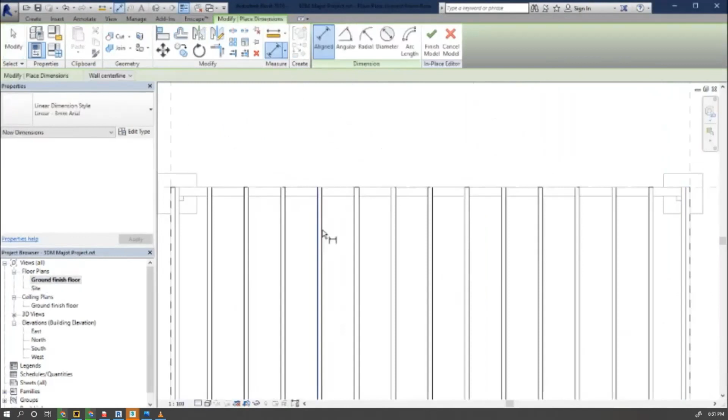Let's see, if I go to the ground floor and look at the distances, I see my distance is about 425. That's okay, that's actually fine. And the great thing about using this method is that I can change the amount anytime. So I'm just going to choose finish, and then I have my 15 members here.

So let's look back at our reference image. Next, we want to have our actual flooring, and notice the flooring comes before the bottom plate or sole plate. In our case, the flooring is going to be tongue and groove boards. So we're going to do the same thing again, and have the flooring coming this way.

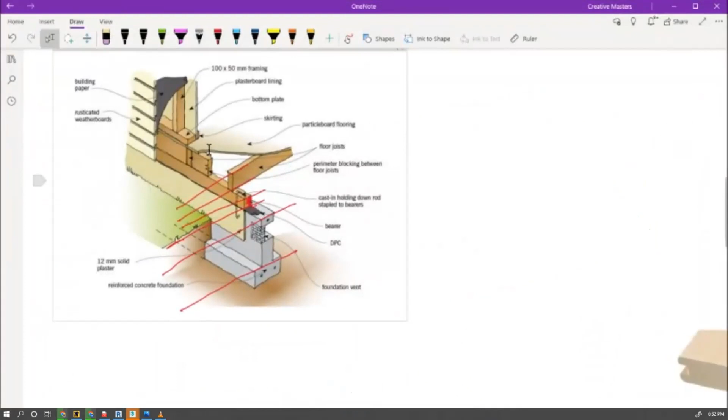Now, if we look at the profile of a tongue and groove board, let's go back here, we use OneNote. We can place all our notes in OneNote, so that's great. This is the general shape of a tongue and groove board, and if we think about using some measurements, we can actually use this as a great reference. So now we're going to model our tongue and groove boards.

All right guys, are you still here? Are you alive? Yes. Okay, glad to see you're still here. Do we know most of the things that were just discussed? Some of them. I'll say most of it, yes. Okay, perhaps some of us won't be as familiar. Also, I didn't notice it with the recording when I was doing it, but there is some feedback. Are you guys hearing it well, it's the computer fan spinning in the feedback. Are you hearing it? Were you guys hearing that? No, sir, not really. Oh, okay.